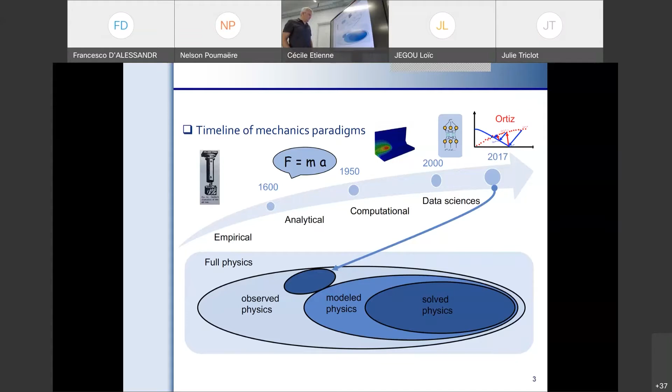So the motivations today are of different kinds. The first one is the ability to develop accurate and efficient models with the ability to use these models in real time, as we will see later.

And in this case, there is a strong link, in fact, in the development of virtual charts or virtual twins. We will see later that the general idea concerns a first step, an offline step, which consists in building, in fact, a twin, a virtual twin, which has the ability to give an answer in real time.

Real time is a specific concept that I have also to define later, because real time depends on the time scale that you want to consider.

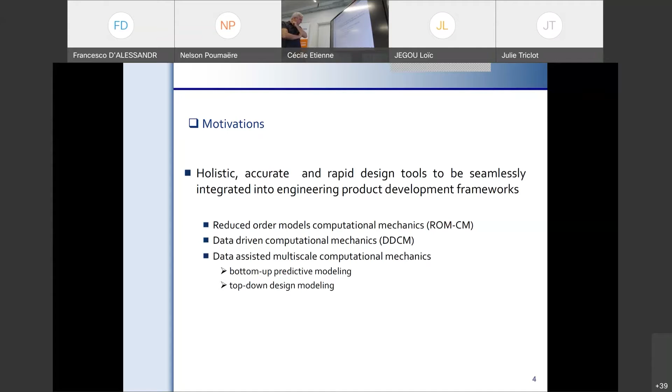This virtual twin can either be based on reduced order models, as we will see, for instance the simulation of a welding process, or it can be based on data-driven computational mechanics or data-assisted multiscale computational mechanics, depending on the way you follow the different scales, from bottom-up predictive models or top-down design modeling. I will give you some examples of this kind at the end of this course.

If I come back to process simulations, the standard approach consists in defining a four-dimensional transient nonlinear model of such a process. It concerns a coupling model between thermal and mechanical effects.

The idea is to be able to develop a virtual chart instead of developing a costly numerical model based on the approximated solution of a complex set of partial derivative equations, by a new virtual chart, which is a summary of such a model, built offline and then used in an online stage in order to study different kinds of quantities of interest.

Here in mechanical engineering, we focus in practice on fields such as the temperature field, the stress field, or for instance, for a process such as welding, we are interested in distortion fields.

So the idea is to be able to build real-time simulation with possible dependency on different kinds of parameters. These parameters can be material parameters, the yield stress, parameters from thermal effects, or parameters from the load. Here, for instance, the velocity of the heat source can be a parameter of such a virtual chart.

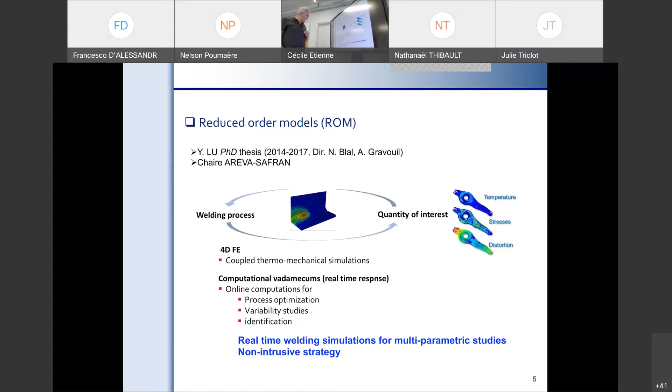Furthermore, here we propose to develop virtual charts which are non-intrusive. It means that, for instance, if you use a finite element software, we want to be able to use it in the offline stage with no development inside this software. It can be a commercial software, and we want to use it with no specific developments in order to build the virtual twin.

So reduced order models offer a very interesting way in order to reach this goal, to obtain an efficient virtual chart, virtual twin of the process, in order to be able to use it in real time.

Furthermore, what is interesting in such approaches is that you have two kinds of reduced order models. In fact, in the literature we mainly have a priori reduced order models, which can be used on the fly during a nonlinear simulation when you want to increase the efficiency of the solver, in order to obtain a good solution in a reduced CPU time. And on the contrary, we also have a posteriori reduced order models.

These are based on two steps, an offline step and an online step. The idea here is to introduce a memory effect in simulations, in computational mechanics. This memory effect is what I call the offline stage, where you use, for instance, finite element software in order to build, at a given level of accuracy, such a virtual twin.

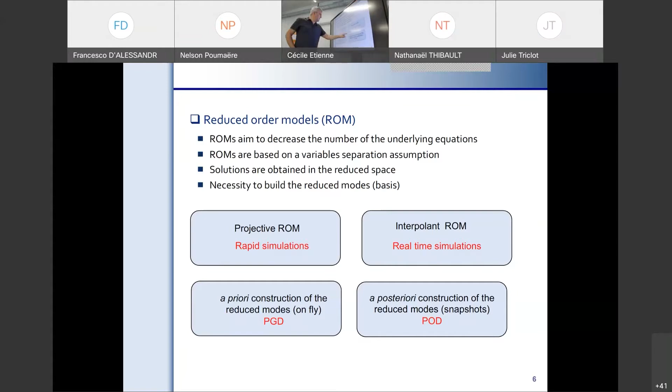Generally speaking, we will see also that after having built such a virtual chart or virtual twin, we have a set of snapshots. A snapshot, for instance, is a four-dimensional calculation which allows us to describe the physical content of the welding process. So imagine that you have a multiparametric space with different snapshots.

The general difficulty, after having developed the virtual chart in the offline stage, is to be able to use it in real time in the online stage. In this case, when you ask the virtual twin to give you an answer on a specific quantity of interest, you have to proceed to an interpolation, an efficient interpolation, because the quantity of interest is not calculated in the previous offline stage. So you have to proceed to interpolation.

And what I want to say here is that, in general, a multiparametric space in physics based on balance equations is not a Euclidean space. It is not a Euclidean space. It means that between different snapshots, the standard linear interpolation is not the right way to proceed with interpolation between snapshots.

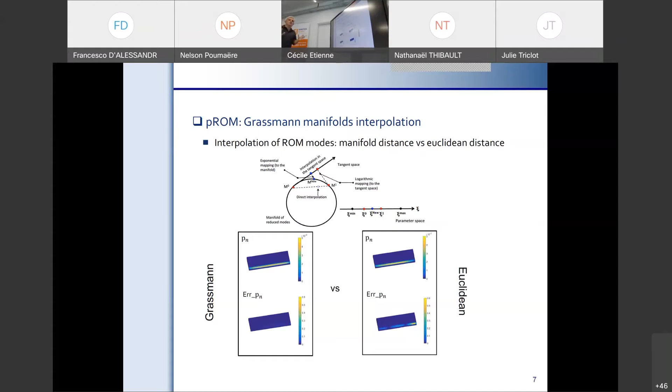For instance, in the 2D case, if you have a multiparametric space of dimension 2, you can use the singular value decomposition in order to obtain a separated variable representation of this two-dimensional space, and then you can use such interpolation techniques. The idea here is that the multiparametric space is non-Euclidean. It is fundamental to understand such methods.

Okay, so it is a complex calculation, 2 or 3 hours with a finite element software, because it is a transient thermal simulation with a nonlinear dissipative model for the mechanic part, elastic, plastic, plus different nonlinear effects in the material. So the multiphysics coupling of such a model involves transient space-time simulations.

The time dependency here is, you can find the time dependency of the problem in the transient thermal effects, and also in the fact that you have an elastic plastic model, for instance. So there is a history effect. You have internal variables or hidden variables that allow to describe plasticity, elastic plastic models. Okay, so such models, even in quasi-static, have a strong time dependency.

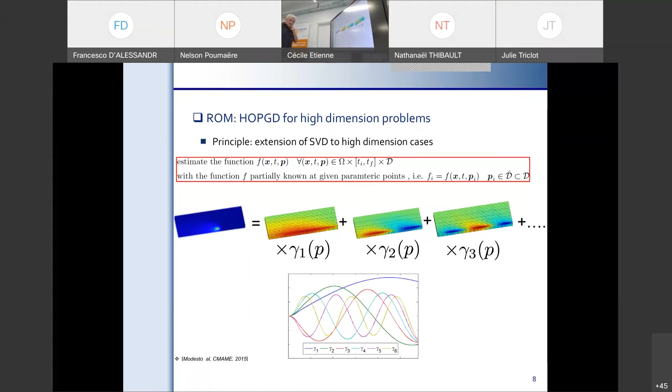Okay, so the general strategy is the following. Instead of developing learning methods and so on, I prefer to use the concept of virtual twin or digital twin, as I explained in this slide. This afternoon with Paco Chinesta, you will discuss more accurately the concept of digital twin, virtual twin, or more generally, hybrid twins. What I call a digital twin or virtual twin is simply an executable model, a virtual model with strong physical content. The constraints I add to such a virtual twin are that it has to be physically based, accurate and efficient, and also frugal, as I explained before. Fundamentally, it is a physically based model.

So either you have balance equations - the first and second principles of thermodynamics, linear and angular momentum, and balance of mass - or you can keep a set of such equations and only use data from experiments concerning the material stress-strain law of the system. But globally, we want to keep the spirit of balance equations in physics: Newton's law, and the first and second principles of thermodynamics, in such an approach.

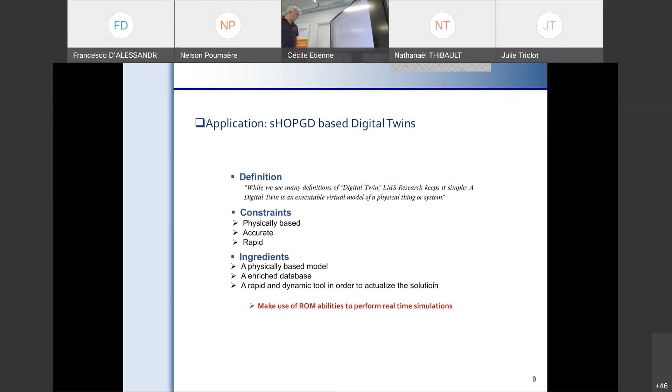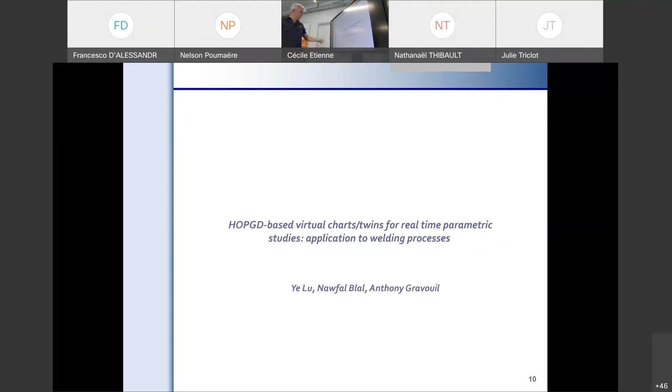I propose to give you a first example: the development of virtual twins for real-time parametric studies, applied to the welding process. It is based on a specific reduced order model, an a posteriori one, the high order proper generalized decomposition, which is a variant of the proper generalized decomposition proposed by Paco Chinesta more than 15 years ago. We will see that it is a good way to build efficient virtual twins, and we will see in this case what I mean by efficient.

So the welding process is of interest, for instance, in engineering applications, as you can see here, either in aeronautical applications or for nuclear power plant applications - many applications. So it is, even today, a process of great importance in such applications.

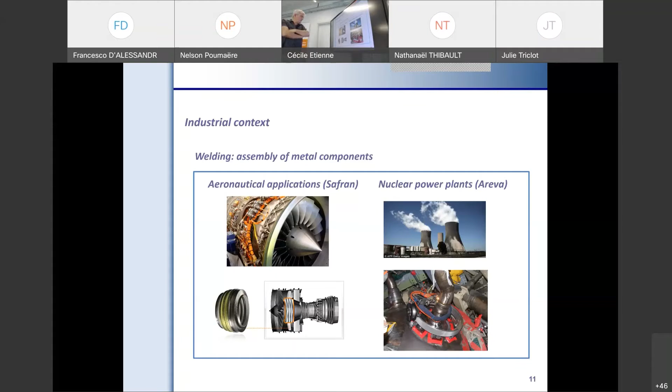What we want to develop in this case is a virtual twin of such a process, for many reasons. For instance, imagine you have a virtual twin for the simulation of such a process, which is a multiphysics and multiparametric problem, because it depends not only on space and time - it is not only a nonlinear and transient model - but also on many other parameters, such as material parameters, thermal parameters, or mechanical parameters. It also depends on the heat source, its intensity and velocity, here based on a laser, as you can see on this slide.

Furthermore, you can have other parameters, for instance geometric parameters, the thickness of the two plates used in this process, because you can have a strong dependency of the different quantities of interest - the stress field, the temperature field, or the distortion field - on all these parameters: material parameters, boundary conditions, loads, or geometric parameters.

So the main problem we have in such nonlinear simulations is that it is very expensive from a numerical point of view, even today. So what we want is a real-time simulation for such problems.

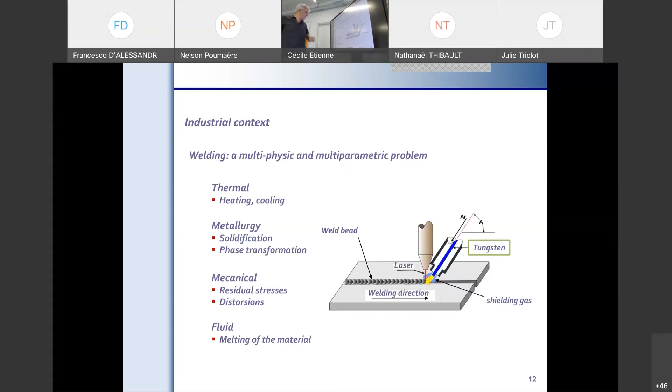So what is the interest of developing such virtual twins? For instance, for optimization - we want to optimize the process - or for identification. Imagine you have specific material parameters with a high level of error, or it is not so easy to proceed with identification in such models. So we can also use a virtual twin with a parameter linked to material parameters in order to perform identification compared to data from experiments. We can also account for uncertainties and the dependency of uncertainties on specific parameters.

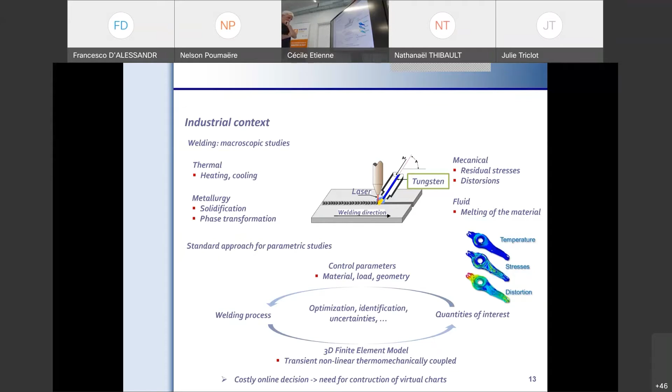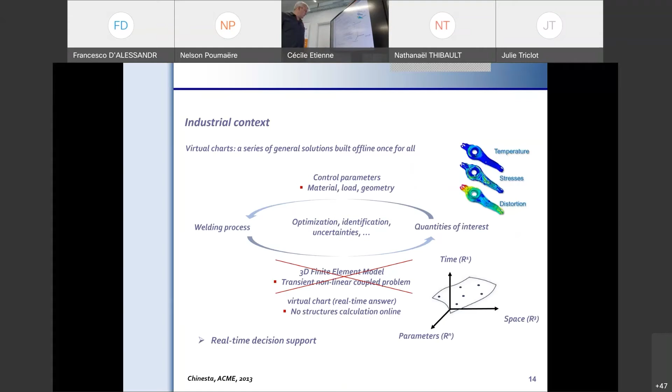So the idea is to avoid the use of standard finite element software and consider, on the contrary, virtual twins which allow real-time use of such a model. So here I propose to give you an example of such a model.

Okay, so here, before showing you how it works and how it is developed from a theoretical point of view, I propose to show immediately a virtual twin on a welding process.

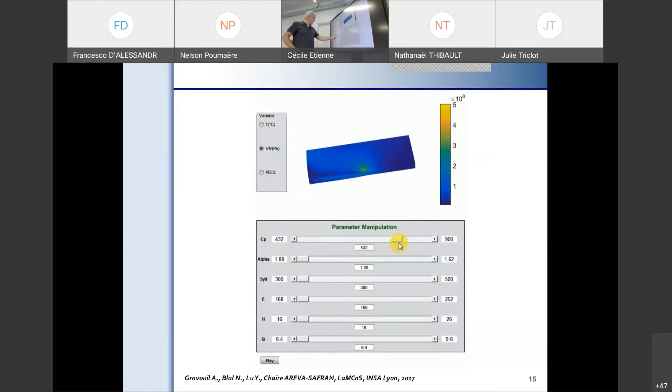Okay, so how does it work? What we want, first of all, for the construction of virtual twins, is high fidelity welding simulation of the process with a non-intrusive approach, if you use a given specific dedicated software for welding simulation. We want to optimize the storage of this virtual twin, okay, and also we want to be frugal, okay.

I think that when you develop numerical models, you want to have a good level of accuracy, you want to be efficient, okay, you want to be stable and so on, and robust. But also I think today that we have to be frugal in terms of numerical simulations. Expensive simulations are not frugal, so I think that today it is a good way to choose between different kinds of numerical methods, and we want to guarantee a good level of accuracy for this virtual twin.

And at the end here, we want the virtual twin to have the ability to give an answer in real time. Okay, for instance, real time depends on the use of the virtual twin. For instance, if you are an engineer and you want to use this virtual twin in order to help you

make a choice between different parameters, so 1 or 2 seconds is enough. I mean, in this case, to help an engineer choose between different parameters.

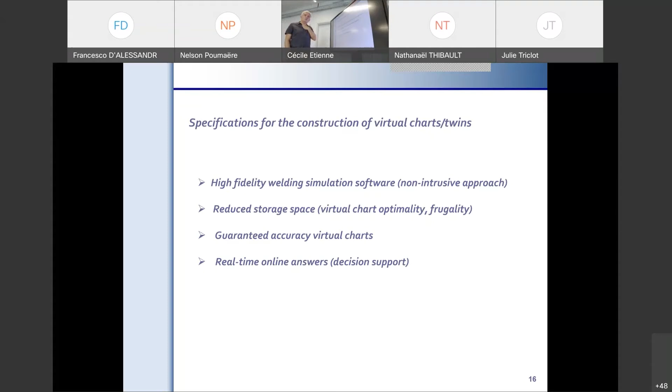But if you want, for instance, to develop a feedback between the process in real time and the virtual twin, then in this case real time means 0.001 seconds. Okay, if you want to couple the true process and the virtual twin, for instance, it can be of great interest in practice. Then the real-time answer does not have the same time scale. So real time here depends on the use you want to make of such a virtual twin.

Okay, generally speaking, the theoretical concepts are simply singular value decomposition, or extensions to this concept. The singular value decomposition is, in my point of view, if you have a multiparametric space, nothing more than a sum of products of 1D functions. But the singular value decomposition is only available in 2D spaces, so the extension to n-dimensional spaces—there are many ways to extend this to n-dimensional spaces.

For instance, the proper generalized decomposition. So here you have, at the end, a field U, which depends on space, on time, on mu1 until mu_n for n other parameters, nothing more than an approximation based on a sum of a product of 1D functions. Okay.

And such a representation is very interesting for virtual twins because in the multiparametric space, it is of great interest for real-time simulation. If you want to have the answer in a very short time, it is very easy to give you the answer when the approximation is based on a sum of a product of 1D functions.

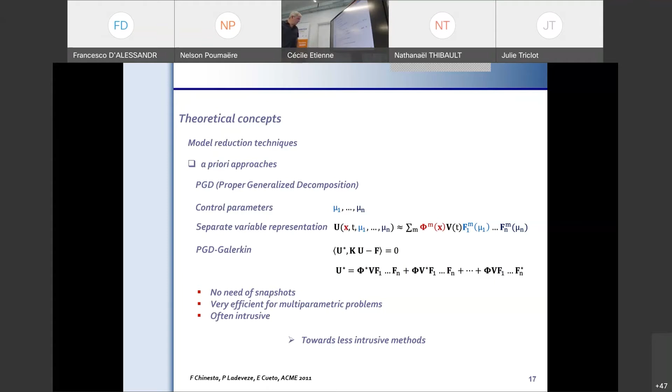Okay, so based on this, we are able to build a reduced order model. For instance, you can use a part of this decomposition. You can store the different modes. Mode 1 is the product of each 1D function for each parameter. Mode 2 is the product of all the other 1D functions for each parameter, but corresponding to mode 2, and so on. So mode 1, mode 2, and so on allow us to build what we call a reduced order model.

In other words, instead of solving, for instance, a linear problem which can come from finite elements, where K is a stiffness matrix, U is a set of DOFs for the displacement field, and on the right-hand side you have the external load, you can reduce such a problem on a subspace based on the first modes instead of solving the full problem of dimension equal to the number of DOFs, which can be very big. So the idea is very simple in this case.

You can use this 1D separated variable representation in order to build a reduced model, and we will see after that how to generalize such an approach to n-dimensional multiparametric spaces, nonlinear transient problems which can depend on space and time and also all the parameters. And here, don't forget the ideas I introduced before, also the ability, for instance, to interpolate between two snapshots in a non-Euclidean manifold.

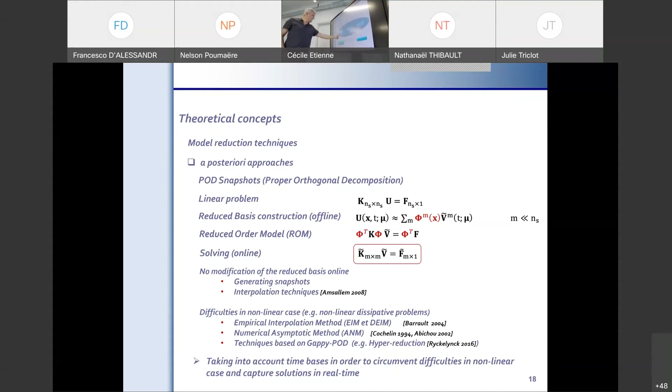So the general strategy can be summarized as follows. In order to develop a virtual twin, it is based at first on a non-intrusive offline strategy. In the offline stage, we use, for instance, finite element software to simulate the welding process. Then we use this commercial software as a black box in order to build snapshots. In fact, we consider that the finite element software is no more than a black box to build data.

And the question is where we have to calculate the data in order to be efficient. I mean, the size of the virtual twin depends strongly on the number of data, on the snapshots. So we have to develop a specific strategy in order to minimize the number of snapshots in the multiparametric space.

Okay, so there are specific strategies for that. And furthermore, we have to reach a given level of accuracy in this virtual twin. It means that when, in real time, we use this virtual twin, we have to ensure a given level of accuracy for the real-time simulation.

So this can be prescribed at the beginning, in the offline stage, in order to be sure that whatever the online use of such a virtual twin is, you have to ensure a given level of accuracy.

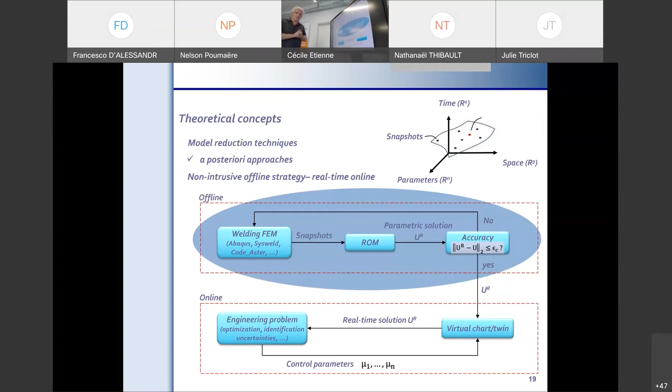Here I propose to focus on the high-order proper generalized decomposition, which is an a posteriori PGD, not an a priori one. It allows us to build, a posteriori from snapshots of space-time finite element simulations, a separated variable representation of the multiparametric space, for instance of dimension 10, as seen before: 3D for space, 1D for time, and 6 for other parameters.

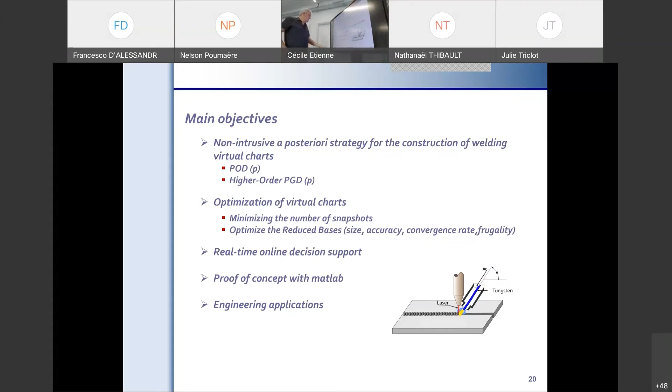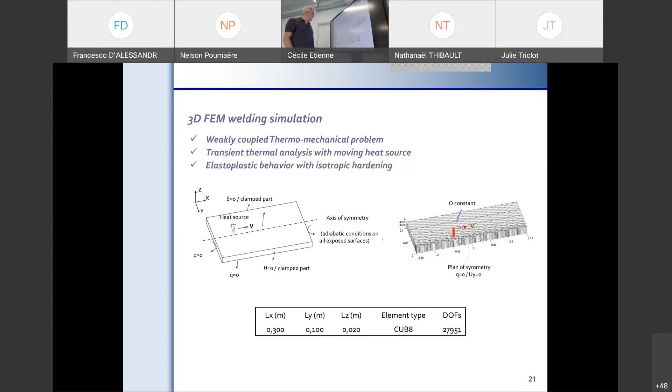This consists of a simple introduction model: a simple geometry with a constant velocity for the heat source. Everything is given - material parameters for the transient thermal simulation, the mechanical model, the geometry, and the finite element mesh.

An interesting comment on the weak forms of this multiphysics formulation is that we can have different frames in order to build this virtual twin. The discussion concerns the choice of frame used to simulate or store information such as the temperature field, stress field, or internal variable fields.

For instance, we have an interesting frame in this application, which is a moving frame - imagine a frame linked to the heat source. I propose to compare the size of the virtual twin and its dependency on the choice of frame: either a fixed frame or a moving frame. We will see that it has a strong effect on the size of the virtual twin.

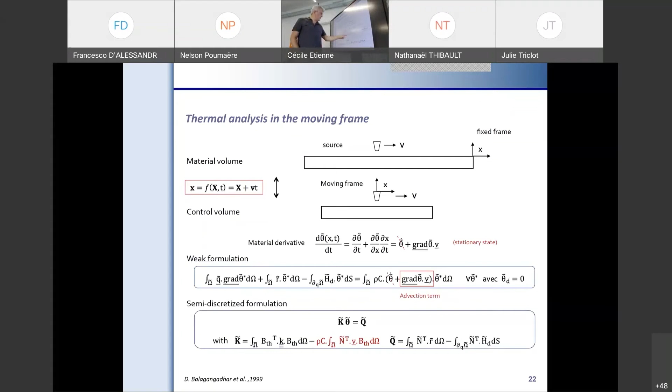So in this first study, I propose to consider a moving frame for the heat conduction problem, the thermal model, and for the mechanical one, to use a fixed basis, which is a standard approach for such problems.

As a starting point, I propose to proceed to a singular value decomposition on the space-time solution. Big U depends on space and time here, and vertically we write a given solution at a given time, where small n corresponds to the number of dofs, and m the number of time steps. So it's a rectangular operator, and we can proceed to singular value decomposition - in other words, a separated variable representation of the space-time problem.

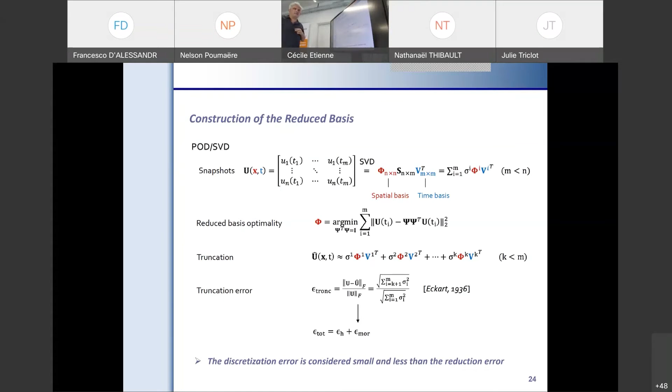The SVD is no more than a sum of products of 1D functions, both in space and time. The singular values sigma 1, sigma 2, and so on correspond to the energy contribution of a given mode. We can also get a good estimate of the number of modes needed, for instance, to reach 99% of the solution.

An interesting comment here is that when you proceed to a singular value decomposition in space and time of a nonlinear transient problem in physics in general, you can see the physical content of the problem - more accurately, you can see the multiscale content of the solution.

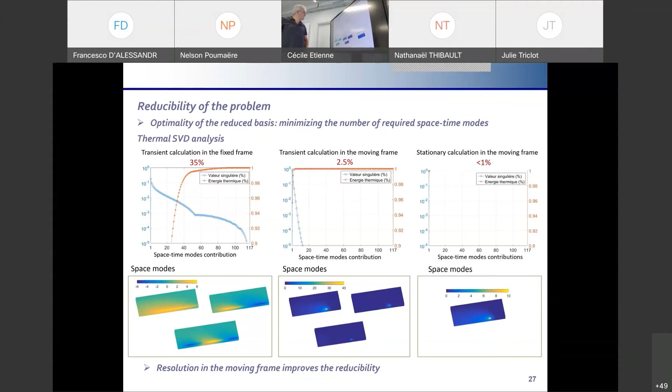Linked to the moving frame of the source. In fact, in this solution, we have not a memory effect. There is no really memory effect in this solution. This is why the moving frame is very interesting. And if you use stationary calculation here, only 1 mode is enough. So it is the best level of compressibility that we can have if you have a stationary model in the moving frame.

I mean for the thermal field. This is in contrast with the mechanical field, for instance, displacement, stress field, plastic strain, or here an internal variable of the elastoplastic model. What is interesting to notice is that whatever is the frame, fixed or moving frame, the level of compressibility is close to 15%, whatever is the field.

Here, it is not possible to reduce the compressibility because you have memory effects, in fact. In the mechanical field, you have internal variables, and such variables are not very easy to reduce in terms of storage. So there is no really a dependency here on the frame, on the compressibility of the mechanical fields.

Tony, could you precise if in this example the spatial extent of the domain is finite or not? Because it could change the result of your analysis.

Okay, thank you for the question. So here in this case, the spatial discretization is finite. We account for boundary conditions in the 3D. It is a 3D model with finite dimensions on the 3 directions with specific boundary conditions.

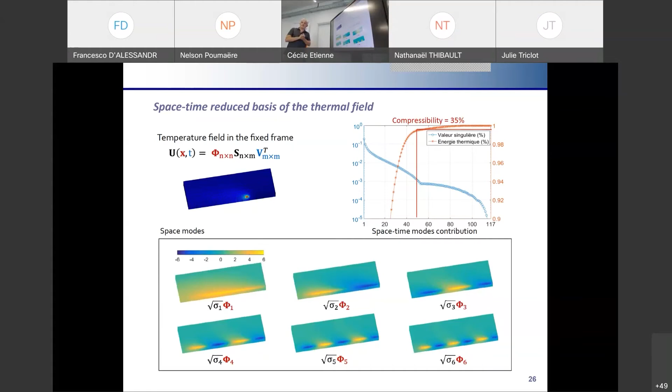So it is interesting because when you develop virtual twins, when you develop such reduced order models, you have to account for, in my point of view, the level of compressibility that you want to reach. And there are many ways to improve the compressibility of such a virtual twin.

Here, for example, the choice of the frame is a key point. And what is interesting also is to make the link between the choice of the frame and the history effects in the different fields.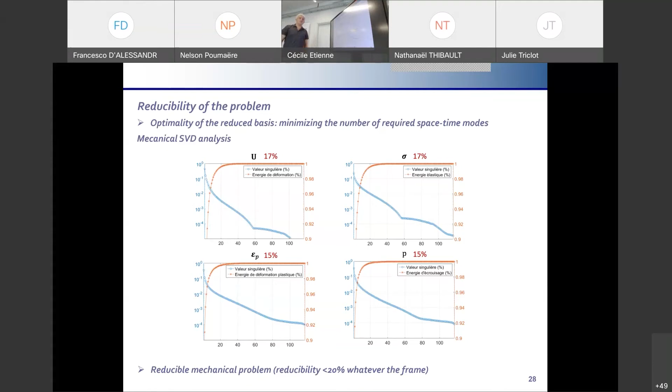Okay, then to conclude, if you remember the general idea, you have a multiparametric field, big U here, which from 1 to D, the number of parameters, space, time, and other kind of parameters. And the idea is to build a sum of product of 1D functions, in other words, a separated variable representation of this multiparametric problem.

Here, I focus in this introduction on D close to 10, okay? Not 100, 1000, but only 10. It is quite enough for such problems.

And in fact, the idea here is to use a canonical decomposition of tensors. Assuming that you have a cuboid here, for instance, then it corresponds to a sum of the product of 1D functions. It is a canonical decomposition of tensors of order 3. Here we have high dimension tensors in this case, according to D. But whatever is the value of D, we assume that we have an efficient canonical decomposition of such tensors.

The problem that we have for D bigger than 2 is that we have no more the Eckart-Young theorem. In other words, there is not unicity in such a decomposition. The 1D modes are not orthogonal together. You can build a posteriori an orthogonal decomposition when D is bigger than 2, but this orthogonal decomposition of 1D tensors is not unique.

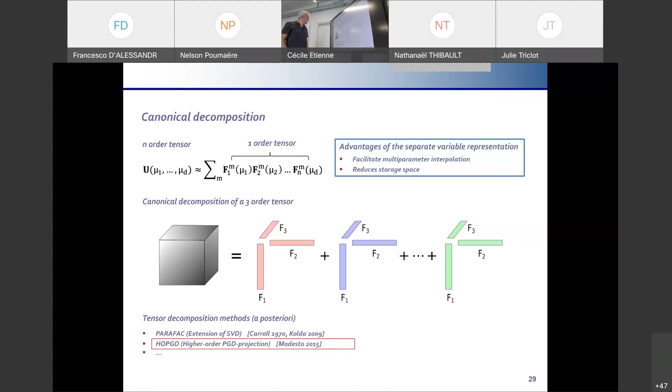So here we propose to use, instead of such approaches, the high order proper generalized decomposition, which is very efficient in order to build a posteriori 1D decomposition, the sum of 1D functions, separated variable representation of such multiparametric space, until 10.

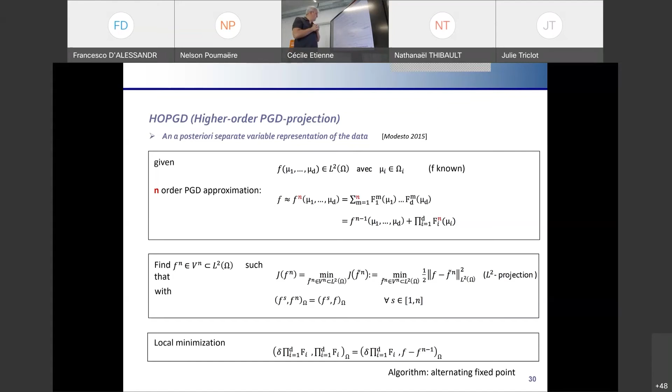Okay, I don't want to focus on the details, I prefer to show you some examples. It is mainly based on the PGD, but it is an a posteriori PGD, an iterative process based on an alternating fixed point strategy. We want to minimize the distance between different snapshots. Imagine you have a set of snapshots and you want to build this 1D decomposition, a separated variable representation of the multiparametric field. At the end, you have a sum of the product of 1D functions.

However, I want to focus on this slide on a technical aspect. It is well known that such approaches, such as PGD, converge slowly because you don't have good orthogonal properties between the modes. So you can introduce orthogonal properties in the modes to accelerate the convergence, or you can also use very interesting dynamic relaxation techniques proposed, for instance, by Aitken. This is of great interest to improve the convergence rate of such methods, in order to recover in a very short CPU time

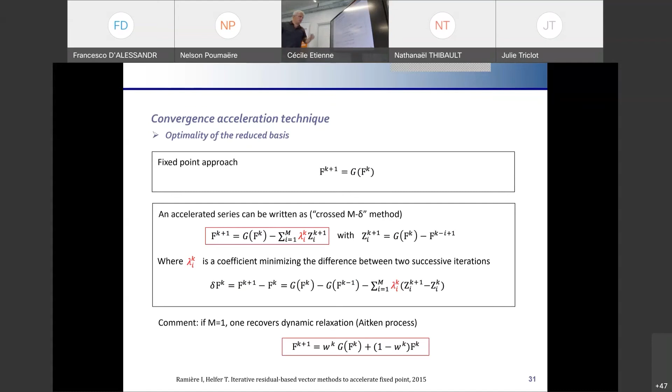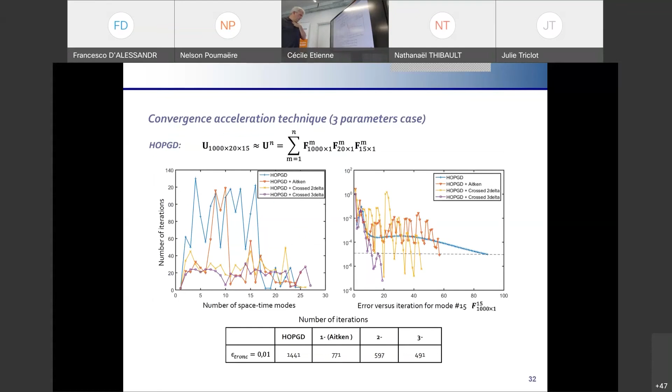the separated variable representation of multiparametric fields. So you can notice this interesting technical aspect in order to have a high-order proper generalized decomposition which is efficient. Some examples here: the standard high-order PGD, in order to reach a given level of accuracy in this problem, needs more than 1,000 iterations, and with acceleration techniques, we can decrease such level of iterations by 2 or 3, whatever the mode is.

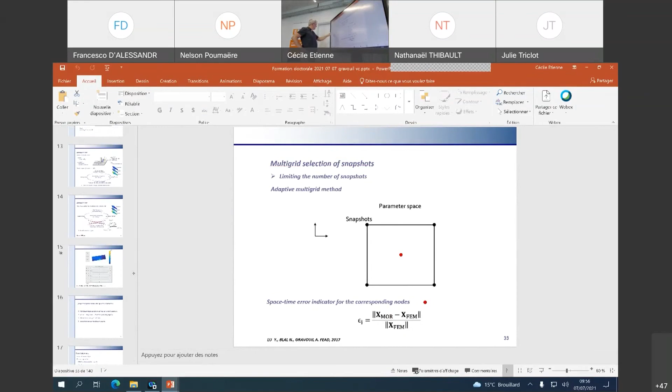And I want to conclude also with the building of snapshots. We have a multiparametric space of dimension 10 — why not, 3 for space, 1 for time, and also 6, for instance, for other parameters. But the question is, if you remember at the beginning, imagine that you have a multiparametric space of dimension 10. This is a hypercube of dimension 10. How many nodes for this hypercube? And imagine that you want to build snapshots in this hypercube of dimension 10, it can involve a very, very important number of snapshots

if you want to use a uniform discretization of such a hypercube. So here the idea is to be able to build efficiently, in a frugal approach, you want to optimize the number of snapshots in such a multiparametric space in order to reach a given level of accuracy. You see, it is quite challenging because here it is clearly the problem of the curse of high dimensionality. If you want to have a small number of snapshots, you have to be efficient in such multiparametric spaces.

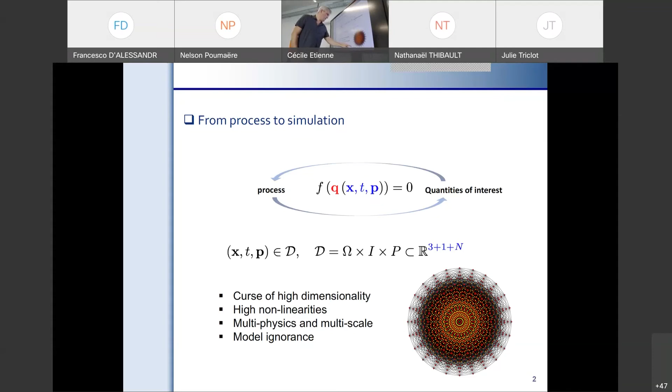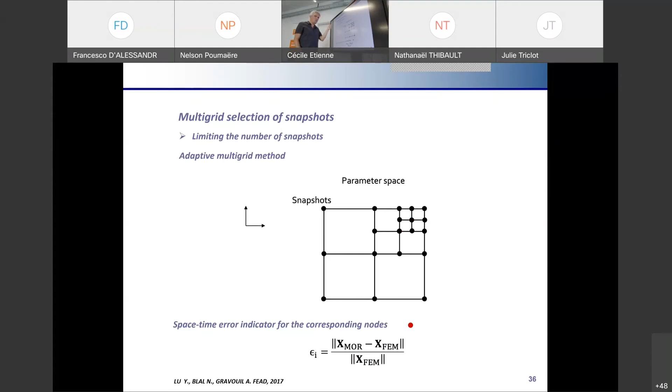snapshots. It seems interesting compared to a uniform discretization of the parametric space, in order at the end to reach the level of accuracy, and in this case you have a specific number of snapshots. I recall here that each snapshot is a welding simulation, for instance, with a finite element software. So it is very important to optimize this number of snapshots.

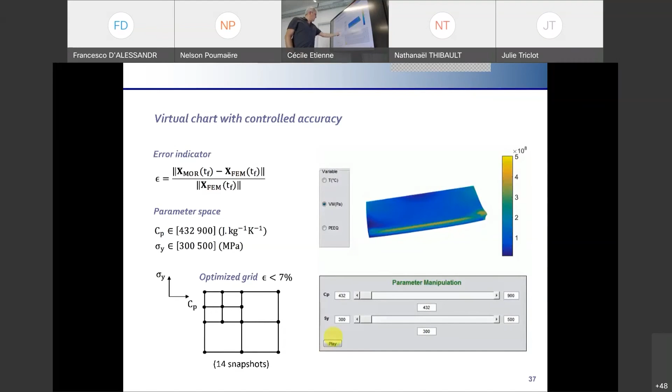Another example: imagine you want to proceed to real-time control of the welding process. It can be of interest to introduce the heat source into the virtual twin. During the moving of the heat source, you can increase its intensity from Q1 to Q2, so at which time and to which value you want to increase it. You can test this virtually in real time using the virtual twin, and even use such models with feedback to control the process in real time. So it can be of interest to use such parameters in the virtual twin.

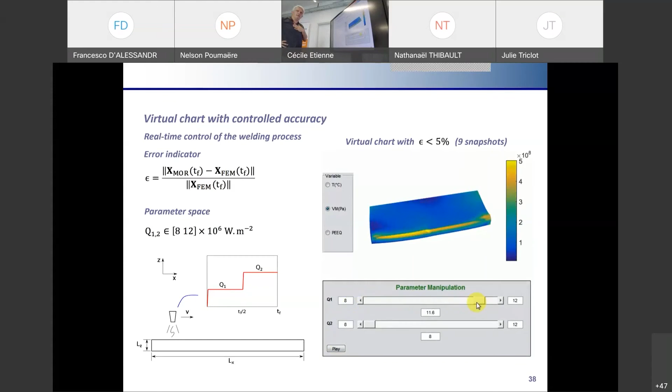In the same way, we have to optimize the number of snapshots in order to be frugal. What you see here, through time, is a user trying to use this virtual twin to test not the temperature field but the stress field in terms of von Mises. The field here is the von Mises stress, which can be of interest in order to check the residual stresses involved by the process.

A last way to improve the frugality of the virtual twin is to use the sparse grid method. It is well known, and it is a very interesting method to build a frugal virtual twin in order to optimize the number of snapshots. So at the end, what we propose is to use a multi-grid adaptive strategy in order to define the position of the snapshots, coupled with a sparse grid method.

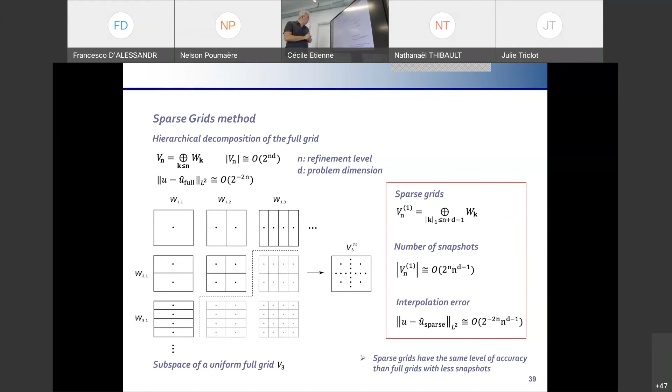Perhaps the best way is to show you a picture to explain how sparse grids work. Instead of immediately using a localized multi-grid strategy in the multiparametric space, the idea of sparse grids is first to focus on the global axis of the multiparametric space, as you can see here, in order to reach a given level of accuracy on the axis. Then, you check on a specific part whether you have also obtained a good level of accuracy. So it is a combination of sparse grids and multi-grid adaptive strategies in the multiparametric space.

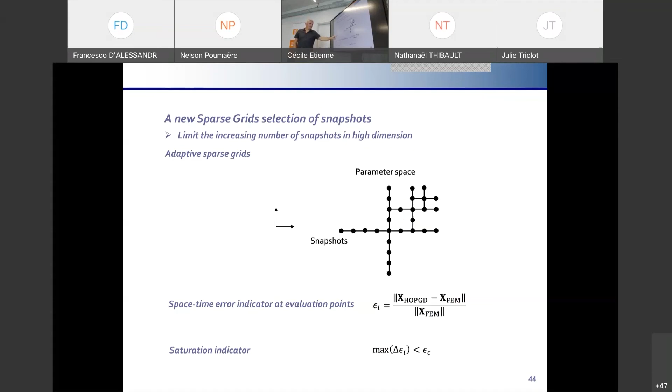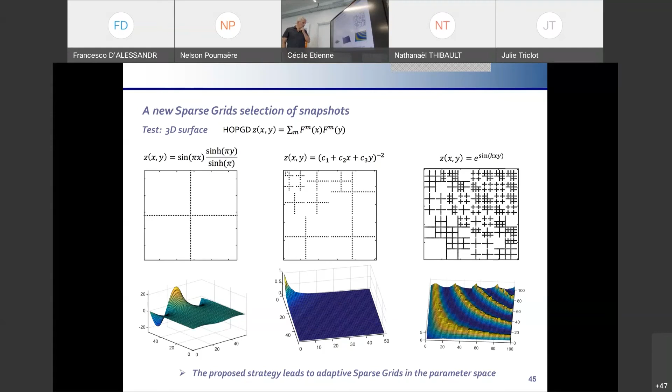It is quite interesting because in this case we have compared with available analytical solutions of different theoretical fields, as you can see here. What is interesting in this slide is that, in order to build high order proper generalized decompositions of such fields, it concerns two-dimensional fields with different frequency contents, as you can see here. You have the sparse grid, multi-grid adaptive strategy in order to be as efficient as possible in the number of snapshots. The combination of these approaches, sparse grids and multi-grid adaptive approaches, allows us to decrease the dimensionality and the number of snapshots compared to a uniform discretization of the multiparametric space.

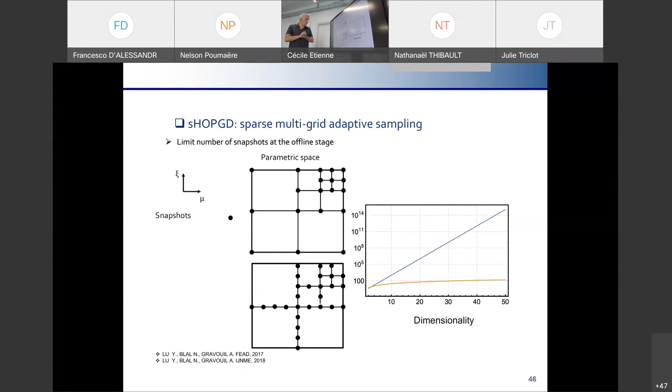So it is important to optimize the size of the virtual twin, the number of snapshots, because even though it is done in the offline stage, it can be quite expensive to calculate all the snapshots in this multiparametric space. I think it is very important to develop multi-grid strategies in order to be efficient in the number of snapshots in the multiparametric space.

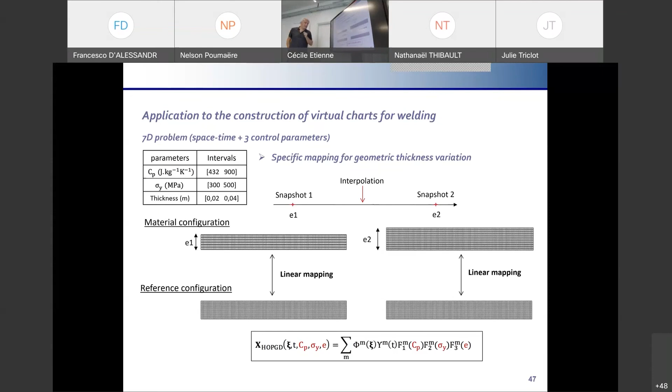In this case, we can also use geometric parameters, even though it's quite simple here since it's only a scalar parameter linked to the thickness. However, it can be of interest, even in this simple case, to improve the welding process. In the same way, we can iterate here to build a multi-grid strategy, optimizing the number of snapshots.

It is a 3D multiparametric space in this case: the heat capacity, the yield stress, and the thickness. So you can see how it works in 3D. And we check for the different fields, temperature, strain, or plastic strain, to see if we reach a given level of accuracy, here close to 10%.

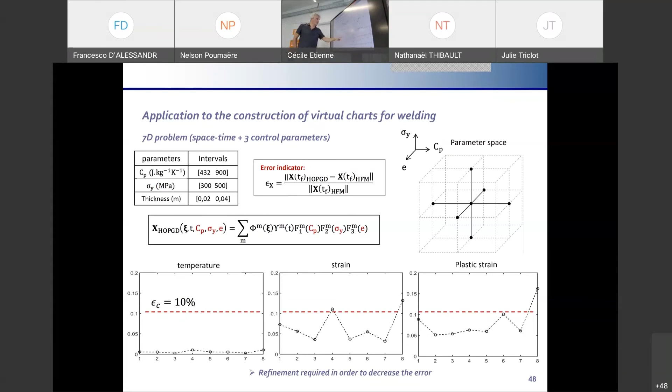As you can see here, two fields are not accurate enough, so we have to refine locally in the multiparametric space, first following the sparse grid approach, refining on the main axes of the multiparametric space, and then locally refining in the area of interest where we don't reach a good level of accuracy.

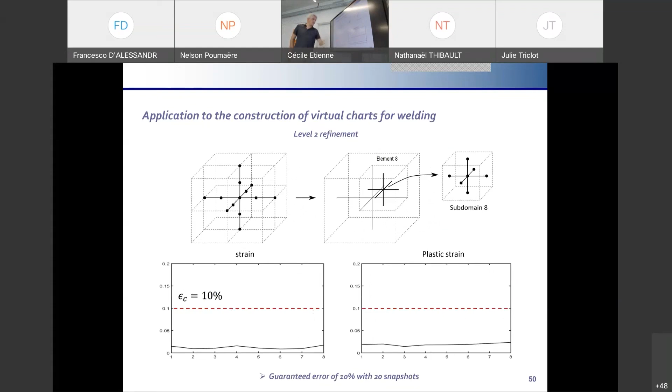At the end of the process, we can ensure a good level of accuracy of the virtual twin on the different quantities of interest. Here's a last example of such virtual twins. The quantity of interest here is the von Mises stress, in order to check possible residual stress at the end of the process, and we can also use the thickness as a parameter. So here you have, in real time, the transient space-time simulation of the welding process with different thicknesses.

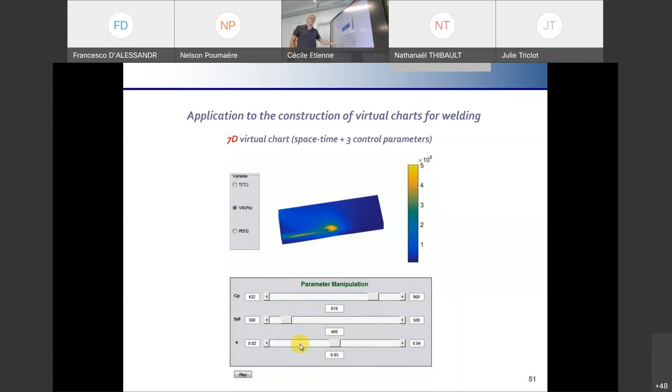So to conclude with such approaches, we have tried to develop these virtual twins up to 10 dimensions: space, time, and 6 control parameters. The only limit, in fact, is the offline stage, because the offline stage can take one week or one month, depending on the number of snapshots. It strongly depends on the level of accuracy you want to reach, and also the dimension of the multi-parametric space.

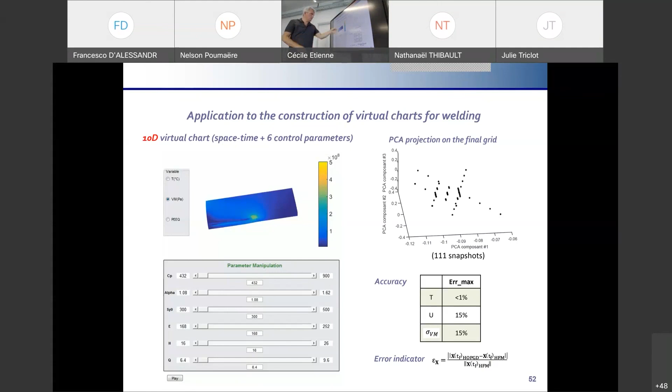And you can use such virtual twins. Here we proceed to a PCA projection in order to plot the snapshots. It's a way to see, in a subspace of dimension 3, what happens in a multiparametric space of dimension 10. So we project a multiparametric space of dimension 10 onto a space of dimension 3. This is what we call the PCA projection, in order to see globally where the snapshots are according to 3 interesting parameters.

And here's a summary of the global strategy, the offline stage and the online one, and the many possible applications of interest for Framatome or Électricité de France, for instance. There are many possibilities now, if you have dedicated virtual twins, to study in detail what happens in a welding process. Here are specific models, well known.

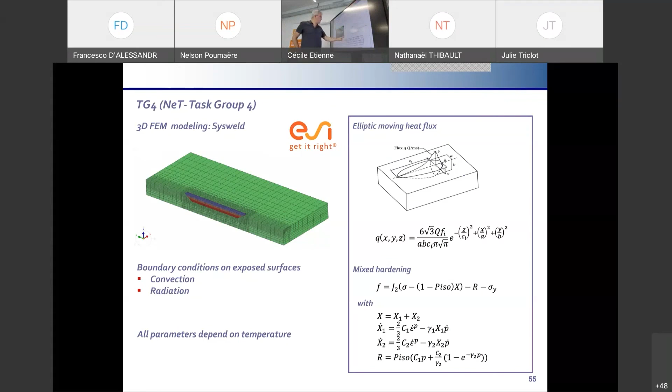In this case, sorry, if I come back to the previous slide, TG4 is an attempt to develop, in fact, a numerical standard for welding, according to specific experiments, in order to understand in detail the residual stress in the bulk from experiments, and also to develop a reference numerical model in order to have good modeling of what happens in such an experiment for all the fields, I mean temperature fields, mechanical fields, and so on.

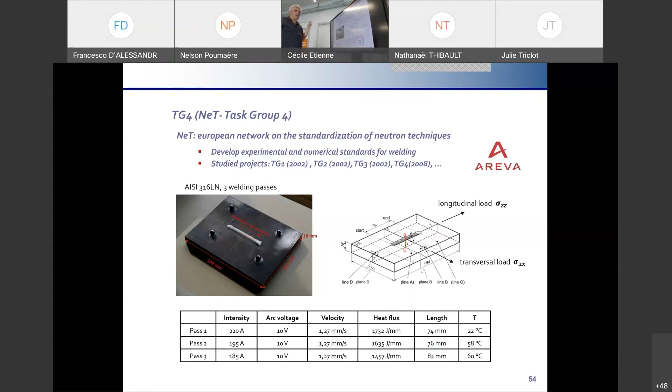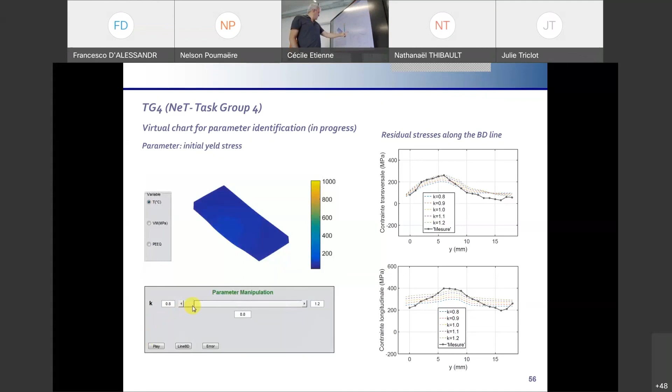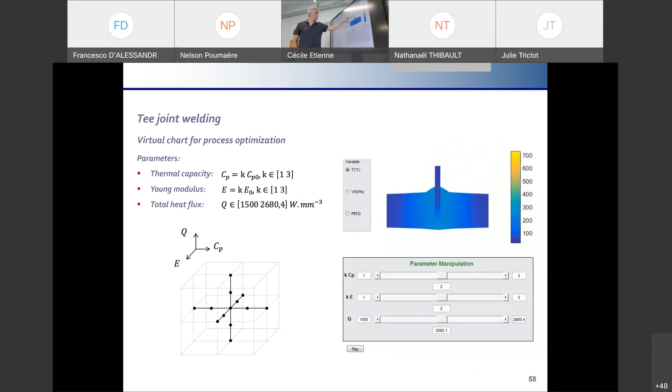Okay, we can also proceed to process optimization on the temperature field. We can conclude this first part on the virtual twin dedicated to process optimization for a given distortion. Imagine in this case, when you have a T-joint welding, you can be interested in the distortion effect in such a welding simulation. If you develop a virtual twin with space-time and 3 other parameters such as thermal capacity, modulus, and total heat flux, you can check the value of the distortion, maximum distortion, in the multiparametric space.

So imagine, in order to plot this, it involves a lot of finite element simulation if you want to proceed step by step according to the value of the parameter. But if you have built offline such a virtual twin, you can obtain in 1 or 2 minutes the optimization according to the 3 parameters of the subspace of the multiparametric space where you reach the condition that the distortion is smaller than a given value.

So it can be of interest also to optimize a specific quantity of interest very quickly. It is not exactly real time, but it can be very fast, and it is an interesting use of virtual twins in such a case.

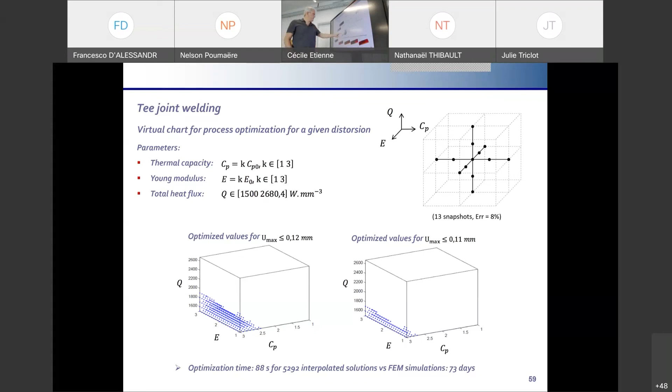So in order to summarize the general strategy that we have developed this morning, first of all, it consists in an efficient and frugal database generation. I mean a set of snapshots, and each snapshot is a space-time transient nonlinear simulation, which can be, in terms of finite element simulation, very expensive in terms of CPU time and so on.

So instead of doing this each time you modify a set of parameters, we propose an offline stage, a learning stage, based on separated variable representation, sparse grid, multi-grid, adaptive strategy in order to optimize the number of snapshots for reaching a given level of accuracy, and also in terms of storage.

And then from this strategy, what we want at the end is a numerical twin, digital twin. I don't make the difference at this level of the discussion. Physically based. And also which allows to use the virtual twin in real time. And the key point here is to be able to build a virtual twin based on a separated variable representation of the different quantities of interest, the different fields involved in such simulations.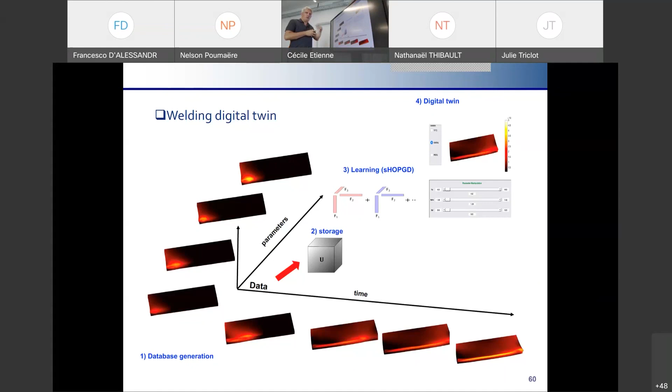And we can add also the fact that in the learning stage, when you have finished the learning stage, you can use a virtual twin in the same way as we have explained before, but also you can come back to the learning stage and improve the virtual twin with more quantities of interest. You can add parameters, new parameters. You improve the level of accuracy. You can keep previous virtual twins in order to improve their ability to be better in the using in real time of such a virtual twin. You can add new parameters, increase the level of accuracy, and so on.

So globally speaking, what I propose here is based on a global learning strategy, a posteriori non-intrusive strategy for the construction of virtual charts or virtual twins. It is mainly based on the high order proper generalized decomposition.

What we want is the answer of the virtual twin in real time. We don't want to proceed to physical simulations during the online stage. Furthermore, we have to optimize the virtual twin in many ways. First of all, we have to optimize the size of the virtual twin in terms of number of modes.

Here, it was interesting to notice the effect of the moving frame on the thermal field, temperature field, sorry, and also a very efficient and multiscale adaptive selection of the snapshots, a combination of local multigrids and sparse grid, and also acceleration techniques for the high order proper generalized decomposition. Then optimization of the memory storage and frugality are of great importance in the definition of such virtual twins. And at the end, as I have explained before, the control of the accuracy.